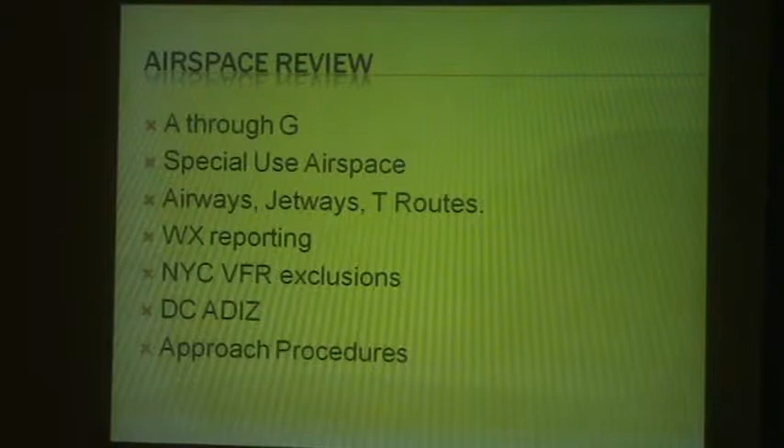Airspace review: A through G, special use airspace, airways, jetways, T-routes, weather reporting, New York City VFR exclusions, DC ADIZ, and approach procedures. He touches on just about all of these in here.

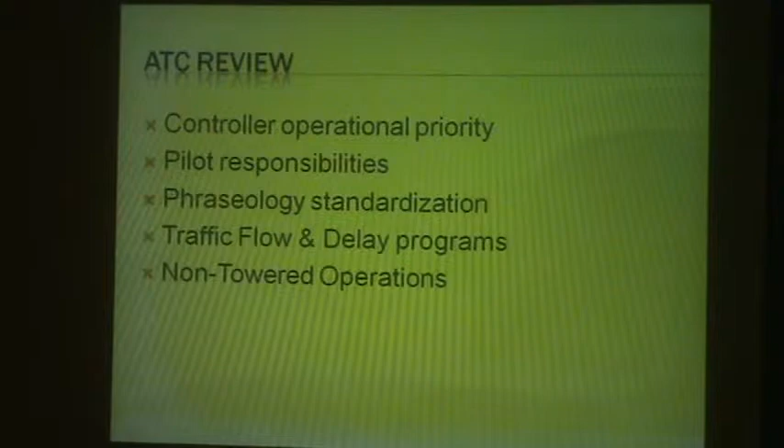Controller operational priority, pilot responsibilities, phraseology standardization, traffic flow and delay programs, non-towered operations. Also talks about lower than standard takeoff minimums, alternate requirements, and inoperative airport equipment.

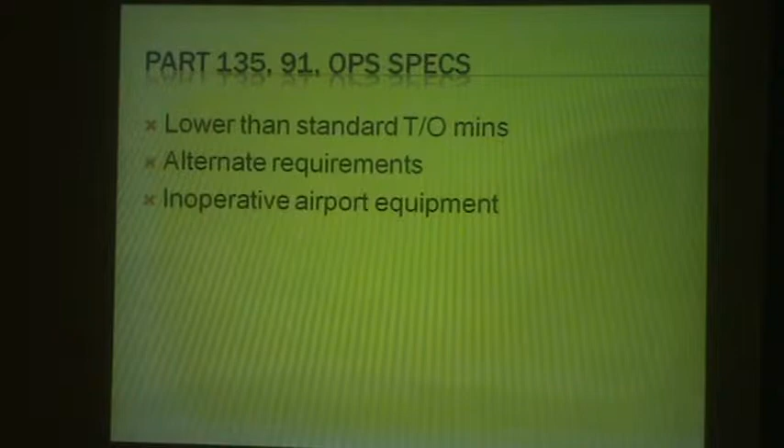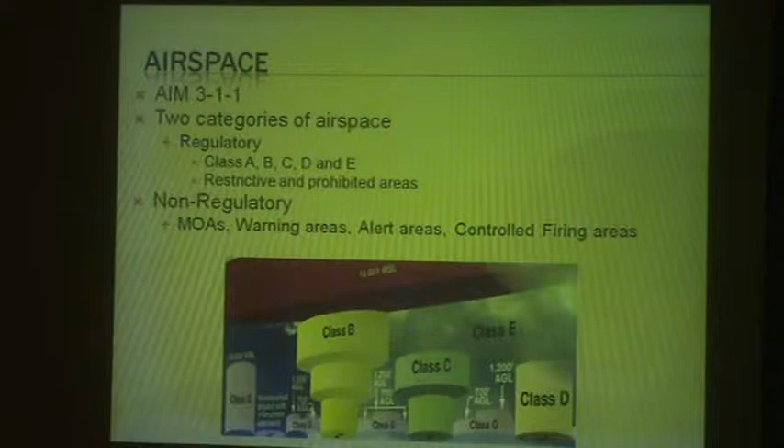So in the AIM 3-1-1, two categories of airspace: regulatory, which is Class A, B, C, D, and E, restrictive and prohibited areas; non-regulatory, MOAs, warning areas, alert areas, controlled firing areas.

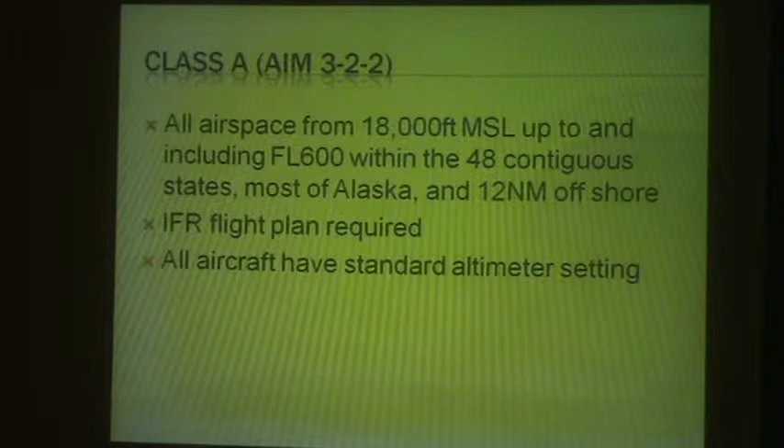All airspace from 18,000 feet MSL up to and including flight level 600 within the 48 contiguous states, most of Alaska, and 12 nautical miles offshore. This is Class A airspace. An IFR flight plan is required, and all aircraft have standard altimeter setting as well.

ATC clearance is required. Communications, radio, and Mode C are also required. You'd have a VOR receiver required for IFR flying, and the Mode C veil is the 30 nautical mile ring around the Class B airport, surface up to 10,000 feet. You're required to have an operative Mode C, obviously, within the Mode C veil.

Class B VFR services: controllers provide sequencing and separation for VFR aircraft when operating in Class B. Separation minima: VFR aircraft from VFR to IFR aircraft, 19,000 pounds or less.

It's going to give you target resolution. Targets on their scope cannot touch 500 feet vertically, and they're going to have visual separation. VFR aircraft from VFR to IFR aircraft, 19,000 pounds or greater: 1.5 miles laterally, 500 feet vertically, as well as requiring visual separation. Such services do not relieve pilots of see and avoid, and maintaining VFR.

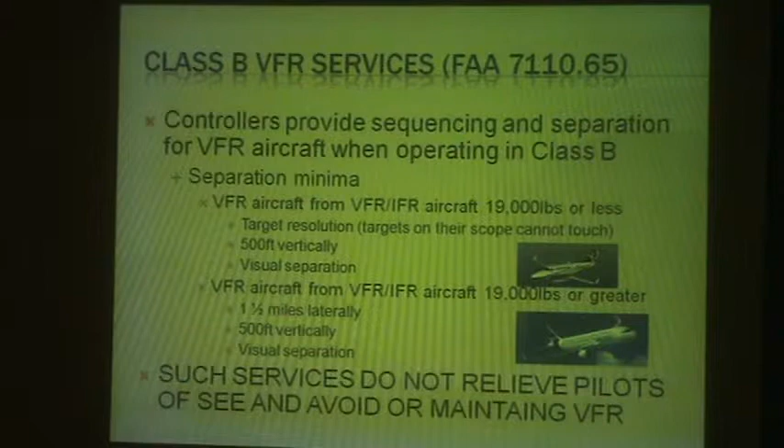Cleared into the Class Bravo airspace. Do we have to hear it? Radar identification and an assigned heading or altitude into Class B is considered a clearance.

Example: departing Teterboro to Martha's Vineyard, VFR at the Albany Tower. Goodspeed 1, New York approach, radar contact, maintain VFR at or above 5,500, upon reaching the Albany Tower resume own navigation. The clearance climbs you into the Bravo.

Always verify clearance when there's any doubt. However, if the frequency is busy and you can't get a word in edgewise, adhere to the assigned clearance, unless it's for safety.

So basically what he's saying here is you don't have to actually physically hear 'cleared into the Bravo.' If they gave you this clearance, that is clearing you into the Bravo. But, like he says here, if you do have a doubt, ask if you can.

What's that? Did they change the rule on that? It used to be where you had to hear the words, right?

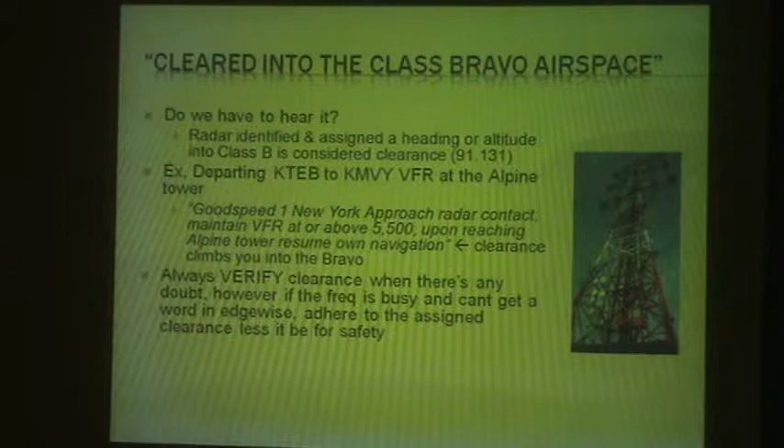I wish I knew, but we talked about it a little bit in the last class, and nobody mentioned that they did change it. As the chief pilot, would you have to know this information? No, of course, that doesn't apply until Monday. It's true, Monday's still a couple days away, right?

Class B phraseology continued. 'Goodspeed 1, cleared into the New York Class Bravo airspace,' as opposed to 'Goodspeed 1, remain outside the New York Class Bravo airspace.'

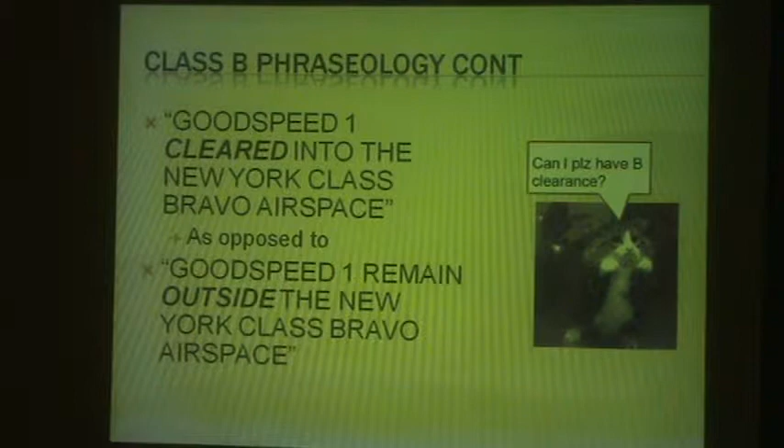Class C airspace: surface up to and including 4,000 feet AGL, tailored for the approaches of the primary airport. Radar and control tower services, communications, radio, and Mode C transponder, unless otherwise authorized.

Two-way communications are required. Included is an uncharted 20 nautical mile outer area surrounding the charted Class C airspace. No required regulatory action for this portion. ATC must provide radar services and separation to VFR and IFR aircraft within that outer area.

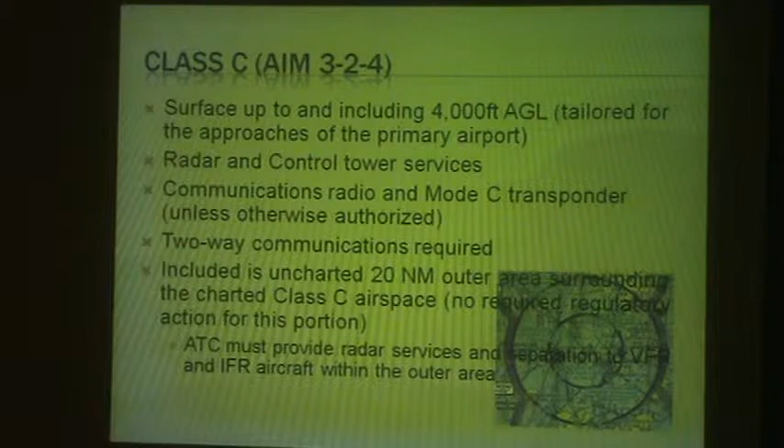Class D: surface up to and including 2,500 feet AGL. Communication radios are required, unless otherwise authorized by ATC.

Tower closed for the evening, you'll be turned into a Class E or G depending on the availability of weather reporting. Check your AFD.

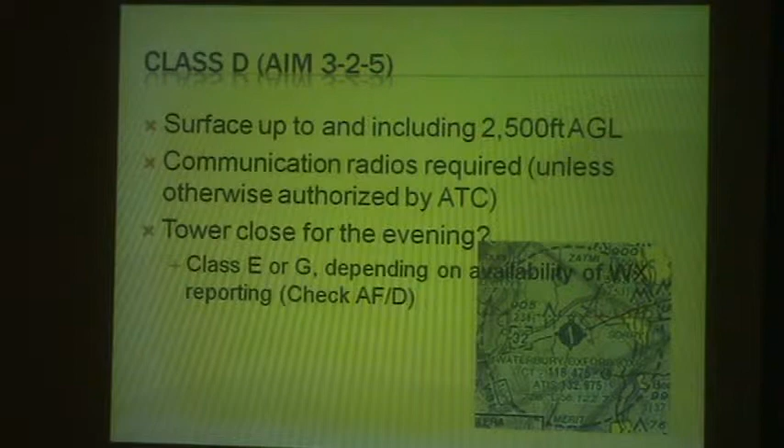Class E airspace: controlled airspace that is not A, B, C, or D, generally extends up to 18,000 feet MSL and above flight level 600.

This includes surface areas around uncontrolled airfields to protect instrument approaches, extensions to Class B, C, or D airspace to contain approaches, transition areas beginning at 700 or 1,200 feet AGL, en route areas that are not considered airways, and also airways.

Unless otherwise charted, it begins at 14,500 feet MSL to, but not including, 18,000 feet MSL. OpSpecs C077 requires turbojet operations to remain within Class B, C, or D airspace, or Class E within 35 nautical miles of destination.

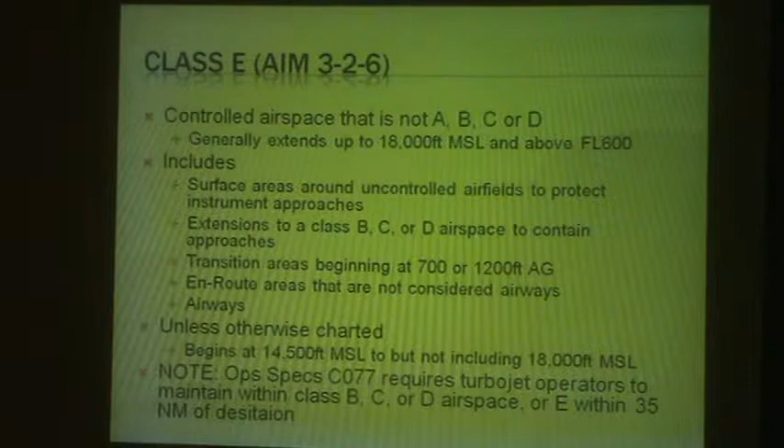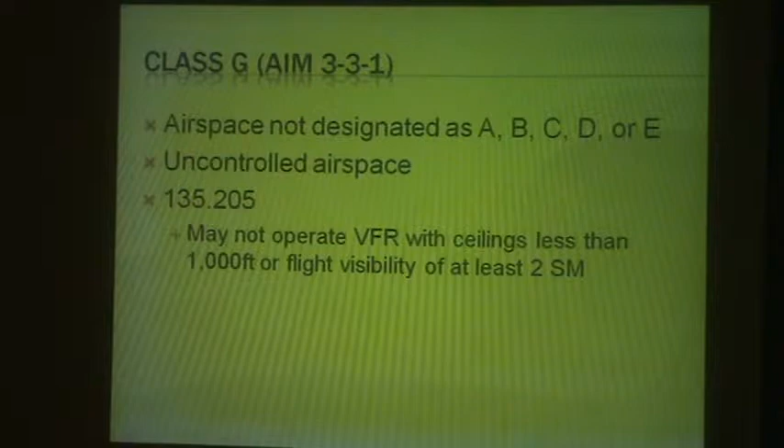Class G is basically anything that's not A, B, C, D, or E, uncontrolled airspace. You may not operate VFR with ceilings less than 1,000 feet or flight visibility of less than 2 statute miles.

VFR weather requirements: in Class A airspace, visibility and distance from clouds doesn't apply. Class B is 3 miles, clear of clouds. Class C is 3 miles, using the 1-5-2-1 rule: 500 below, 1,000 above, 2,000 horizontal. Class D is 3 miles with the same 1-5-2-1 rule. Class E below 10,000 feet is 3 statute miles, 500, 1,000, and 2,000 from clouds, and at or above 10,000 feet it's 5 miles, and 1,000, 1,000, and 1 mile.

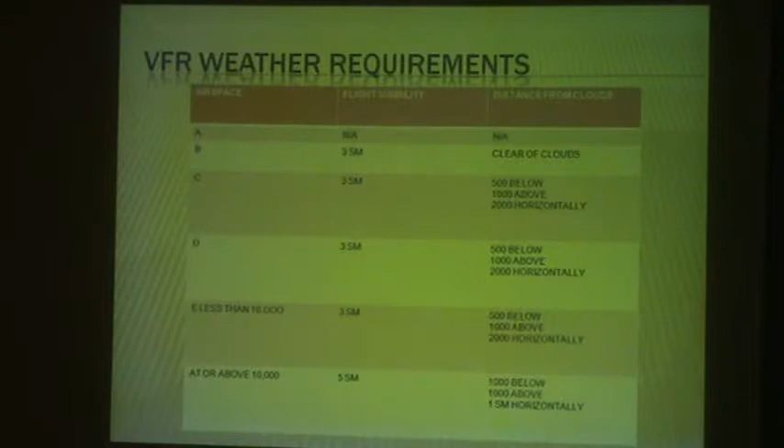Speed restrictions: Class B is 250 knots below 10,000 feet. Beneath the Class B it's 200 knots, unless you're in a VFR corridor like the Hudson corridor. On a procedure turn, 200 knots. Class C or D is 200 knots below 2,500 feet AGL within 4 nautical miles of the airport. Class E or G within the pattern is 200 knots.

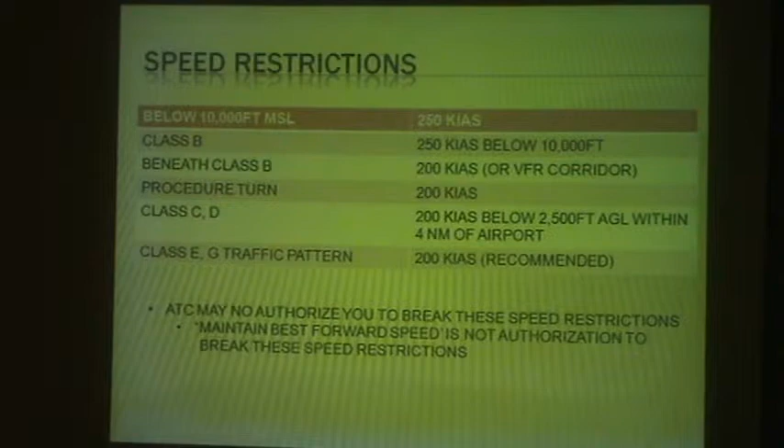Here's a good one: ATC may not authorize you to break these speed restrictions. 'Maintain best forward speed' is not authorization to break these speed restrictions. So if you're going to the Albany Tower in the PC-12 and they say best forward speed, you still can't go over 200 knots.

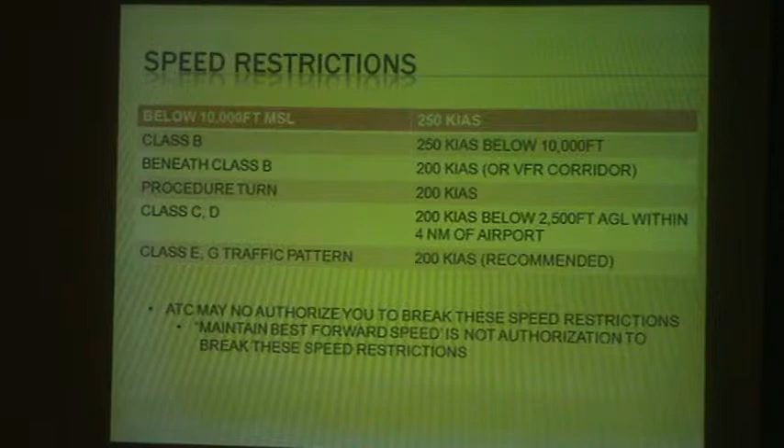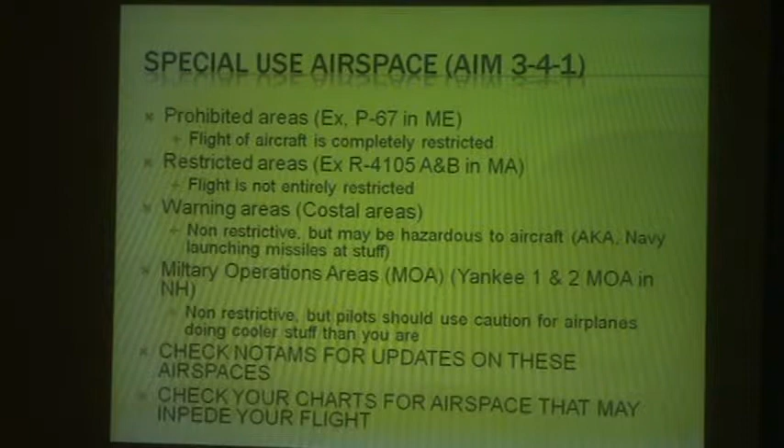Special use airspace: prohibited areas, where the flight of aircraft is completely restricted. Restricted areas, where flight is not entirely restricted. Warning areas, non-restricted but may be hazardous to aircraft, such as the Navy launching missiles. MOAs are non-restricted, but pilots should use caution for airplanes doing cooler stuff than you are. Check NOTAMs for updates on these airspaces, and check your charts for airspace that may impede your flight.

Airways: RNAV and jet routes. Victor routes run from 1,200 feet AGL up to but not including 18,000 feet MSL, standard 8 miles wide. RNAV routes, or T-routes, also run 1,200 feet AGL up to but not including 18,000 MSL. Q-routes run from 18,000 up to and including Flight Level 450, and jet routes run from 180 up to 450.

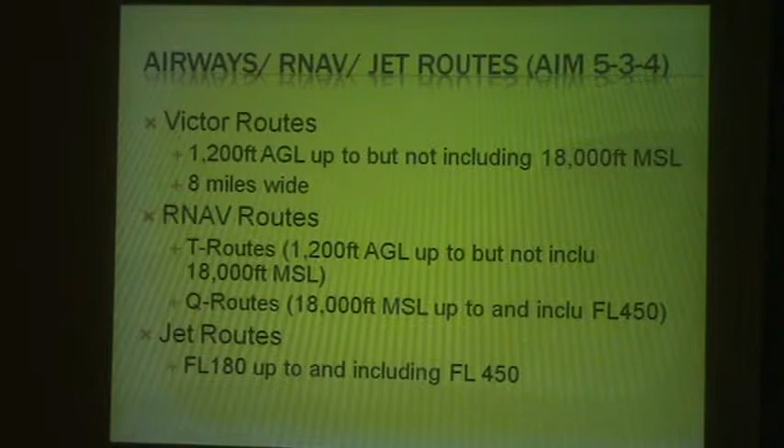A couple of differences between ATIS, AWOS, and ASOS. ATIS, Automatic Terminal Information Service, is a continuous broadcast of recorded non-control information to improve controller effectiveness and relieve frequency congestion, updated on the top of the hour unless otherwise stated as a special.

AWOS is the Automated Weather Observing System, giving minute-by-minute weather updates. An AO1 station means there is no precipitation sensor, while AO2 means there is a precipitation sensor. ASOS is the Automated Surface Observation System, more complex than AWOS, and ASOS stations are used to generate forecasts. Both ASOS and AWOS stations will include the word 'auto' in their broadcast.

New York City river exclusions: you must have a current New York terminal area chart. Airspeed is restricted to 140 knots in both exclusions, and taxi and recognition lights must be on. The Hudson River CTAF is 123.05, so if you're actually doing the transition, use 123.05.

Transient operations are 1,000 feet MSL up to but not including 1,300 feet MSL. I believe this last portion is more for the East River when you're talking to Newark and LaGuardia Tower.

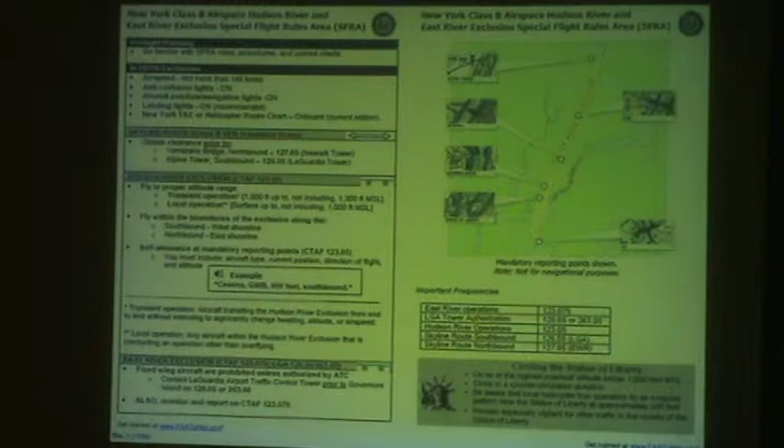Washington ADIZ requirements: a two-way radio, operative Mode C transponder, and you have to be on a flight plan, whether IFR or VFR, for the DC ADIZ, which will be given a discrete beacon code. You have to be in communication with ATC. VFR speed restrictions are 180 knots inside the ADIZ, and a max of 230 knots between 30 and 60 DME from the DCA VORTAC. Always file IFR if you're concerned.

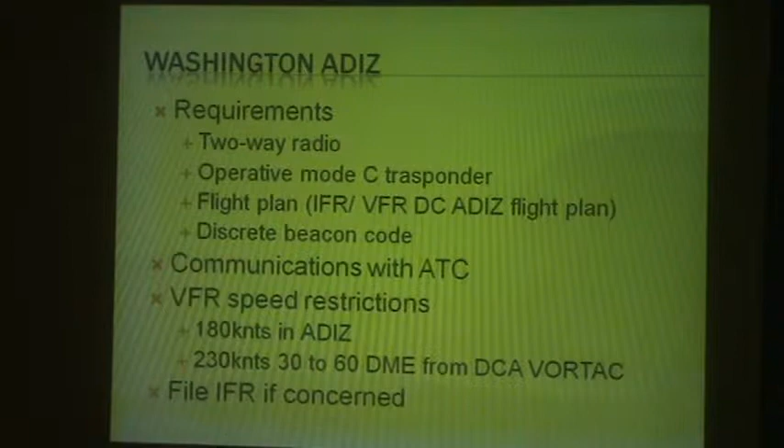The biggest thing with that too is that you have all these gates, so you're always going to come over one of these gates, either inbound or outbound.

Okay, so when you call flight service and you're going to go VFR, you just tell them that you want the VFR ADIZ flight plan. When the president is doing his Martha's Vineyard gig, it's basically almost the same thing as well.

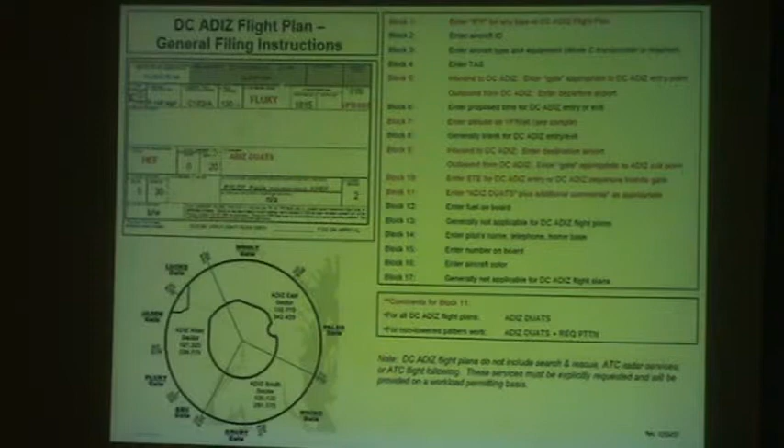Alright, so precision approach. Precision approaches will give you an electronic glide path, with discrete minimums, descent minimums expressed as decision height or decision altitude, DH/DA, where the pilot must decide to continue the approach or execute the miss. Minimums are specified as visibility, however, ceiling must be considered. So usually we're always taking visibility into account, but you have to also consider the ceilings.

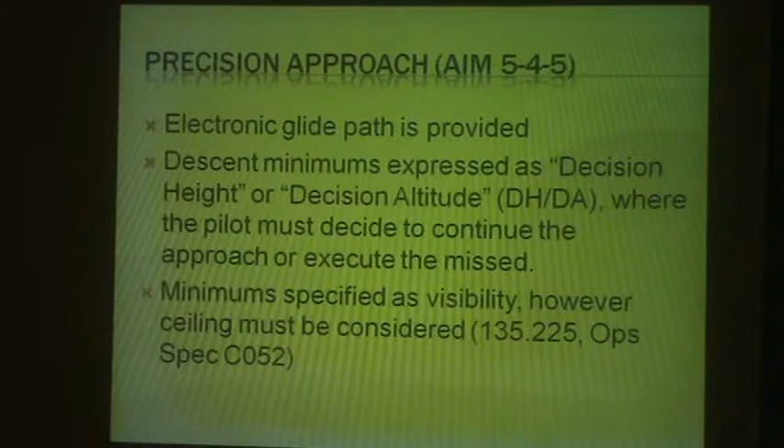Non-precision does not give you a glide slope. VOR, NDB, GPS with LNAV minimums descend down to a minimum descent altitude, MDA, where altitude is maintained until visual contact and a normal descent to land can be made. Vertical descent angle profiles given by GPS approaches using LNAV minimums are still non-precision approaches.

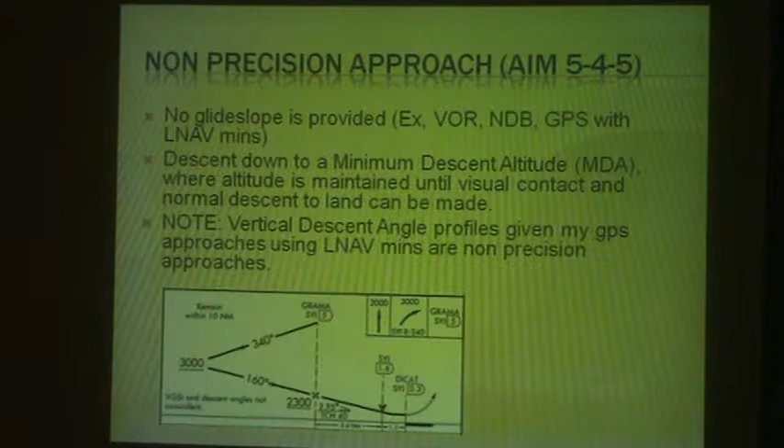Can you go back to the previous slide just a second? Good.

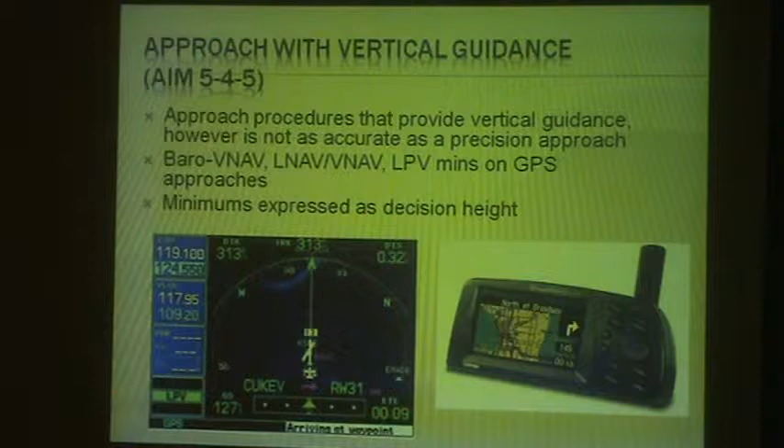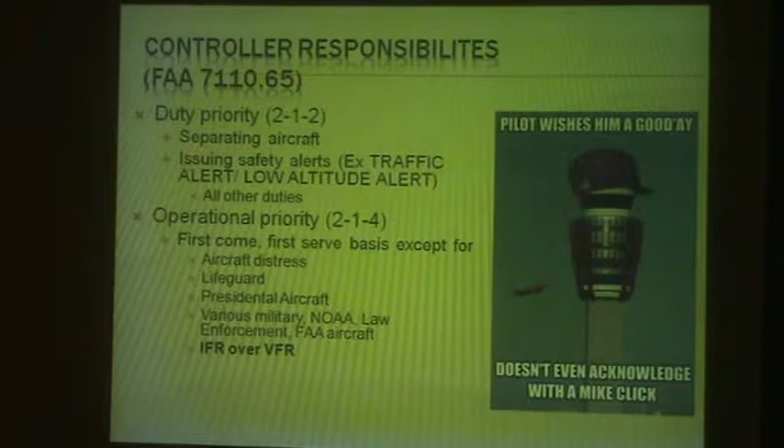Pilot responsibilities. The PIC is directly responsible for and the final authority of the safe operation of the flight. Pilots may deviate from any rule of this part to the extent necessitated by an emergency. Maintain situational awareness, see and avoid in VFR conditions, even if on an IFR flight plan. If ATC gives you a clearance you cannot adhere to safely, it is your responsibility to deny it and request an amendment.

Immediately impresses an emergency, to impress an imminent situation. Example: traffic alert, good speed 1, traffic 12 o'clock, 2 miles, advise you turn right immediately. Expedite impresses urgency to prevent an imminent situation. Example: good speed 1, expedite through 5,000 feet.

Pilot's discretion: ATC authorizes clearance to descend or climb at the will of the pilot at any rate, and may level off at any intermediate altitude as well. Pilot cannot return to a previous altitude. If climb/descent clearance is not stated as pilot's discretion, the pilot shall climb or descend promptly at optimum rate, commencing the climb or descent rate between 1,500 and 500 feet, and I guess that means slowing it down to 500 feet, 1,000 feet before the assigned altitude.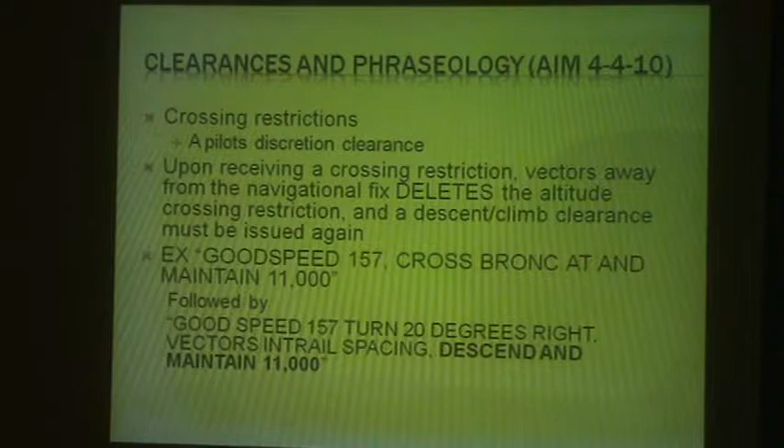Speed adjustments: assigned speeds are deleted upon acceptance of an approach clearance. Airspeed assignment must be restated if needed. Assigned airspeed should not be assigned inside the final approach fix or a 5 nautical mile final. ATC may ask you to maintain a speed inside that point for sequencing. Airspeeds must be maintained plus or minus 10 knots, and it's the pilot's responsibility to deny a speed restriction if unable to maintain the speed for safety, or if they give you a speed faster than the aircraft can go.

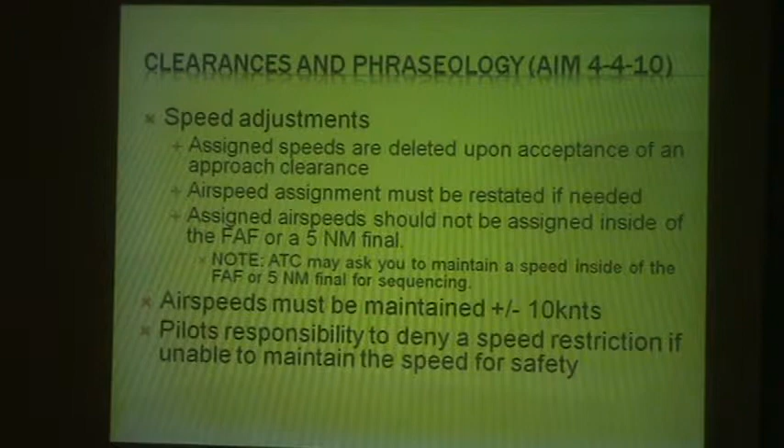There's an overlap of responsibilities between ATC and pilots. The National Airspace System's safety depends on both parties fulfilling their duties. Pilots and ATC make a good team, and aviation's excellent safety record is evidence of that. Pilots are at much higher risk than ATC, so it's important that we hold up our end of the bargain.

Communications: keep communication simple. A basic controller has hundreds of tasks he can accomplish, but only one mouth, two ears, and one push-to-talk switch. Sequencing large volumes of traffic requires every second to work.

Stay alert and listen carefully. Always verify clearances that may have been misunderstood. Keep cool if the controller loses their temper. If unable to adhere to a clearance, when able, offer an alternative. For example: Goodspeed 55 unable VFR on that heading, we would need 30 degrees right, usually followed by approved as requested.

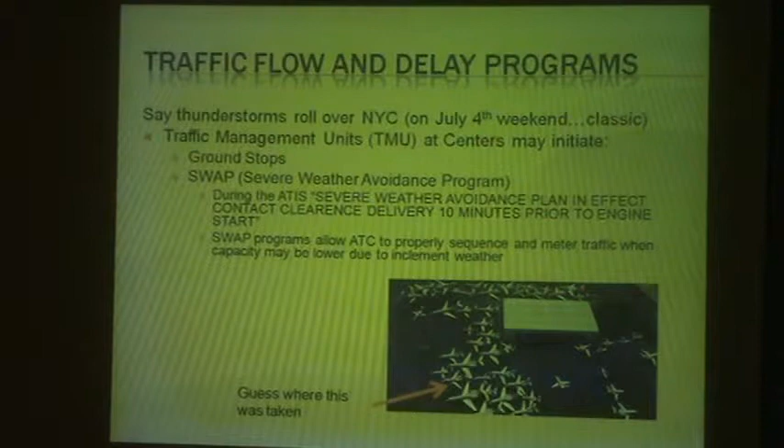Non-towered airport operations: FAA tower closures and reduced working hours on many towers. There's no substitute for our alertness while in the vicinity of an airport. It's essential that pilots be alert and exchange traffic information when operating without an air traffic control tower.

Recommended CTAF broadcast procedures: if outbound VFR, call before taxi, entering a runway, vacating a runway, and departing. If inbound VFR, call 10 miles out, on the downwind, base, final, and when exiting the runway. For IFR, call departing the final approach fix. I'm at fault for this, but 'any traffic in the pattern, please advise' is not advised as a CTAF call.

For two aircraft approaching an airport for landing, the pilot at the lower altitude has the right of way. However, the pilot at the lower altitude may not use this rule to cut off an aircraft on final approach.

All turns are left patterns unless otherwise stated in the AFD. I don't think we need to go over traffic pattern stuff, do we?

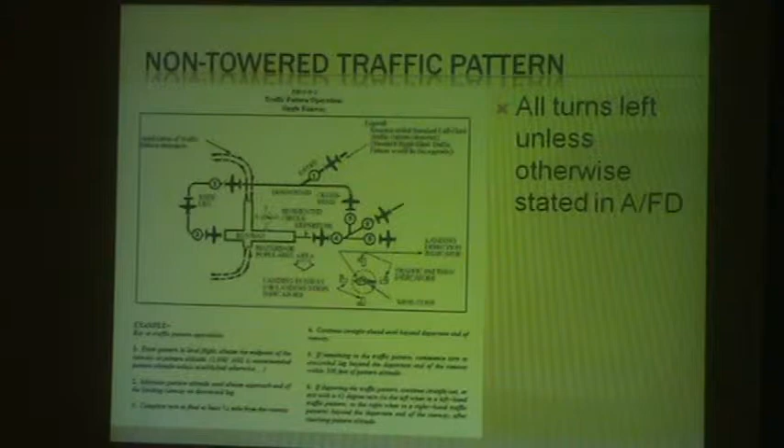Be clear and concise with aircraft location and pilot's intentions, and restate the airport name at the end of the radio call. For example: Fisher's Island traffic, Pilatus 5 November X-ray, 10 miles west, will enter the 45 left downwind, runway 14, Fisher's Island. Montauk traffic, red and white caravan departing runway 6 eastbound, departure Montauk.

Why is it important to say the airport name again at the end? Multiple airports use the same frequency, and somebody might have just tuned in. A lot of people are quick to start talking on the radio, so when you press the button you might drop off the first half of saying Fisher's or Montauk. So at the end, you say it again, and hopefully you'll get it in there at least once.

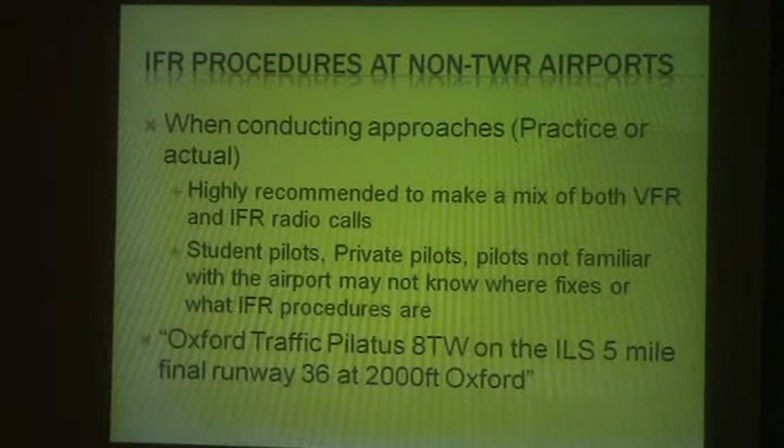IFR procedures at non-tower airports. When conducting approaches, practice or actual, it's highly recommended to make a mix of both VFR and IFR radio calls, since student pilots, private pilots, or pilots not familiar with the airport may not know where a fix is or what IFR procedures are. For example: Oxford traffic, Pilatus 8 Tango Whiskey on the ILS 5 mile final, runway 36 at 2,000 feet, Oxford. That's just an example of mixing both IFR and VFR calls.

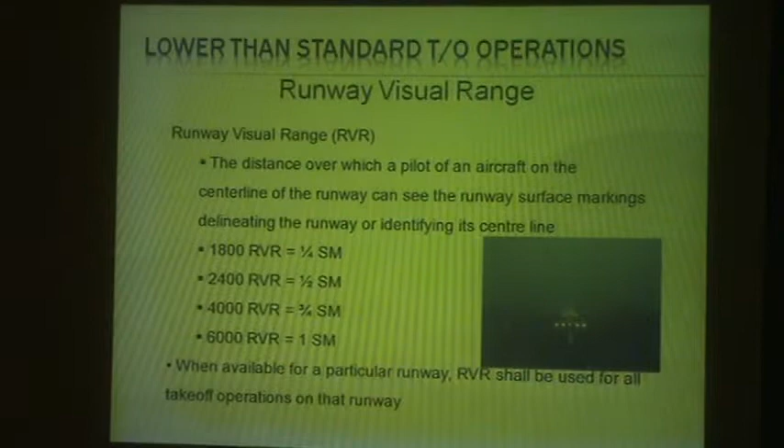Lower than standard takeoff operations: runway visual range, RVR, is the distance over which a pilot of an aircraft on the center line of the runway can see the runway surface markings delineating the runway or identifying the center line. 1800 RVR is about a quarter mile, 2400 is about a half, 4,000 is three quarters, and 6,000 is 1 mile. When available for a particular runway, RVR shall be used for all takeoff operations on that runway.

Standard takeoff minimums per Part 135: 2 engines or less is 1 statute mile or RVR 5,000 feet. More than 2 engines is half a mile or RVR 2,400 feet. If a takeoff minimum is published as greater than standard, that minimum is controlling. Look for the black T on the government charts, or look at the airport chart on Jepp plates. RVR is controlling, so RVR rules.

Under op spec C057, we are authorized to use the lowest Category 1 approach minimum for that airport to establish our takeoff minimums, regardless of which approach is active. Jet crews are authorized even lower than takeoff minimum under op specs C079.

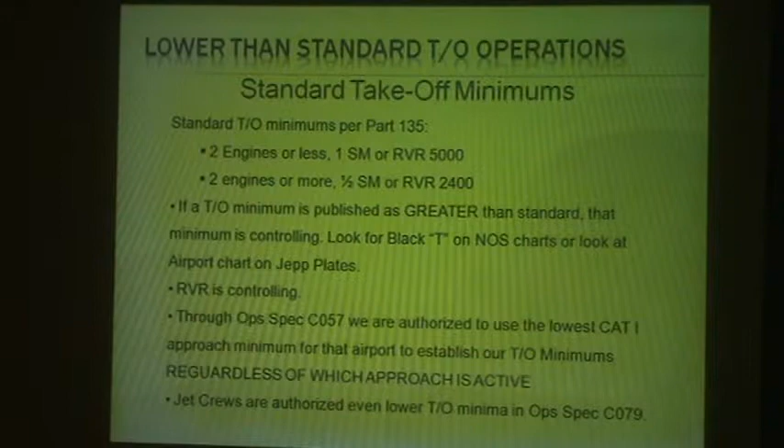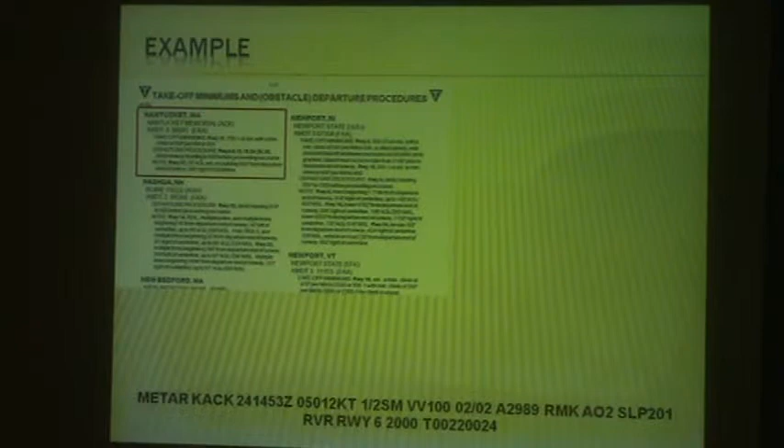So it looks like he came up with an example here. He has takeoff minimums and obstacle departure procedures, as well as a METAR. Nantucket METAR: 050 at 12, half mile, vertical visibility, 100, plus 2 on temperature and dew point. RVR runway 6 is 2,000 feet. So there's our takeoff minima.

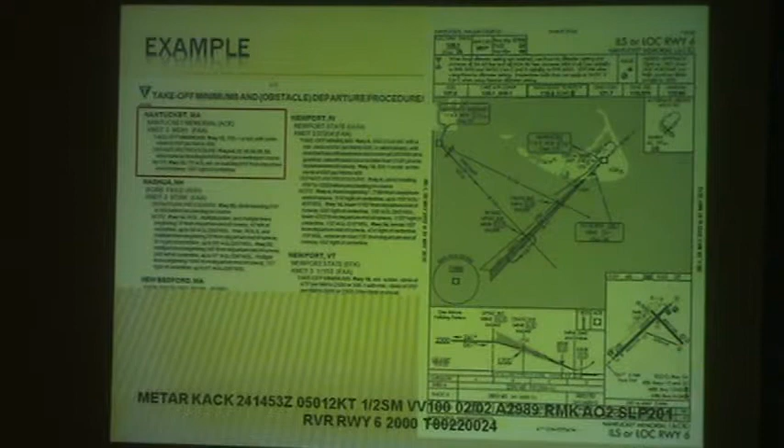Here is our approach plate. We have ILS runway 6, which is 239 and 4,000 RVR. ILS runway 24 is 248 and 1,800 RVR. So that's the lower one.

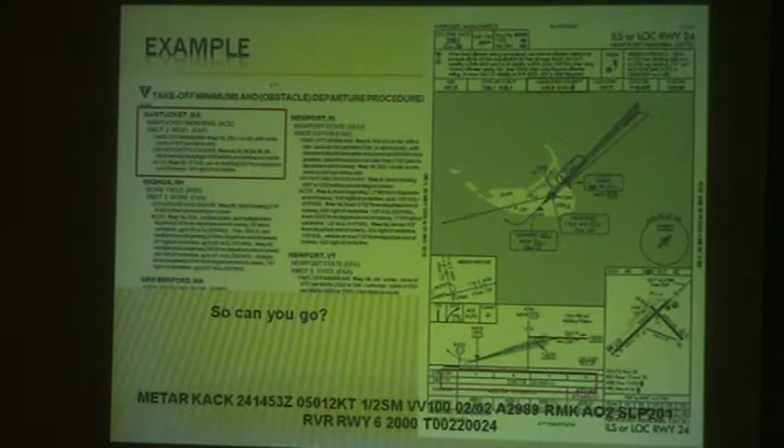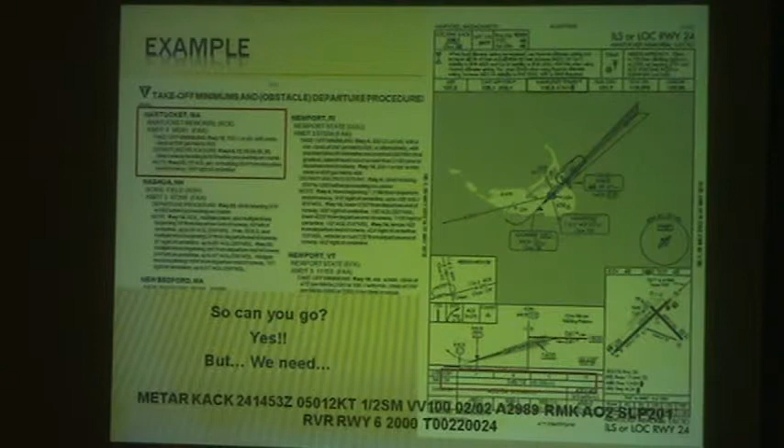So can you go? Can you depart? Yes, this is going to be a real tough one for you Nantucket guys. So you can depart, but what do we need to have? A takeoff alternate. Why do we need a takeoff alternate? Because we can't get back in - because you're departing runway 6 and you're using runway 24's minimums.

Takeoff alternate: do not depart under IFR from an airport where weather conditions are at or above takeoff minimums but are below authorized IFR landing minimums for the runway you are departing from, unless there is an alternate airport within 1 hour flying time at normal cruising speed in still air of the airport of departure.

Since we're departing runway 6, RVR required is 4,000, and using the ILS runway 24, RVR required is 1,800. You may use standard alternate minimums in selecting your departure alternate. This pretty much means if you have no way of getting back into your departure airport using the active approach, you must find an airport that is suitable to do so within 1 hour's flying time.

The certificate holder shall not use any instrument flight rule, any IFR Category 1 landing minimum lower than that prescribed by the applicable published instrument approach procedure. The IFR landing minimums prescribed in this paragraph are the lowest Category 1 minima authorized for use at any airport.

Cat 1 precision approach procedures: the certificate holder shall not use IFR landing minima for Cat 1 precision approach procedures lower than specified in Table 1, reduced landing minima.

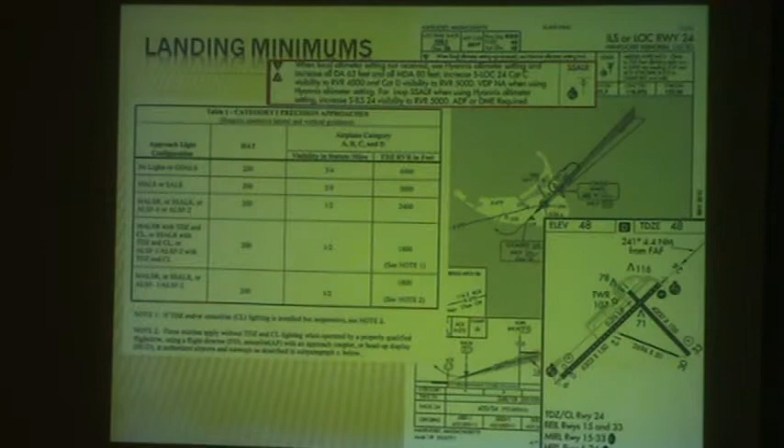Lower than standard takeoff operations alternates: first, the ceiling will need to be at least 1,500 feet above the lowest circling approach MDA, or if a circling approach is not authorized for that airport, the ceiling must be at least 1,500 feet above the lowest published minimum or 2,000 feet AGL, whichever is higher. Visibility for that airport is forecast to be at least 3 miles, or 2 miles more than the lower applicable visibility minimums, whichever is greater, for the approach procedure to be used at the destination airport. Remember, you must consider the forecast winds and other conditions at the airport. If the above conditions are not met, an alternate airport will need to be identified.

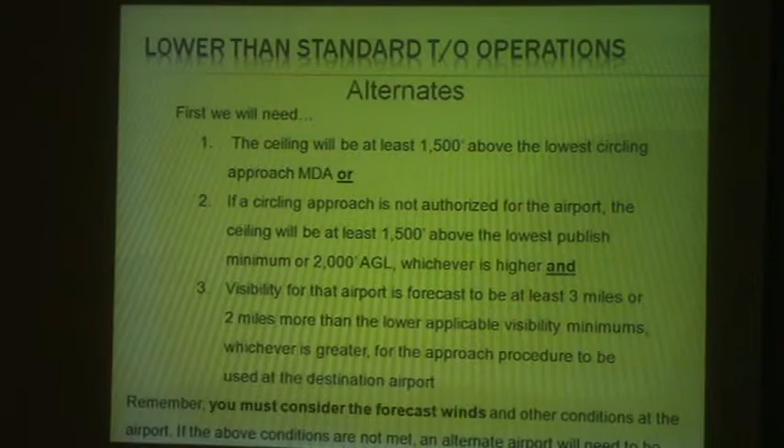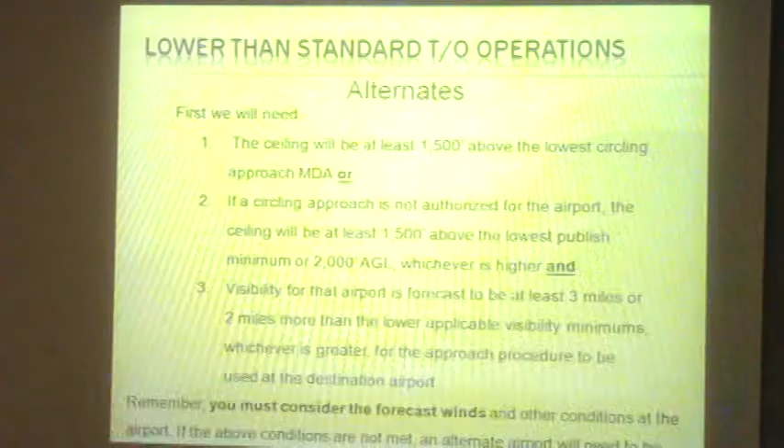Second, we do need to designate an airport as an alternate - approach facility configuration, ceilings, visibility, all that stuff there.